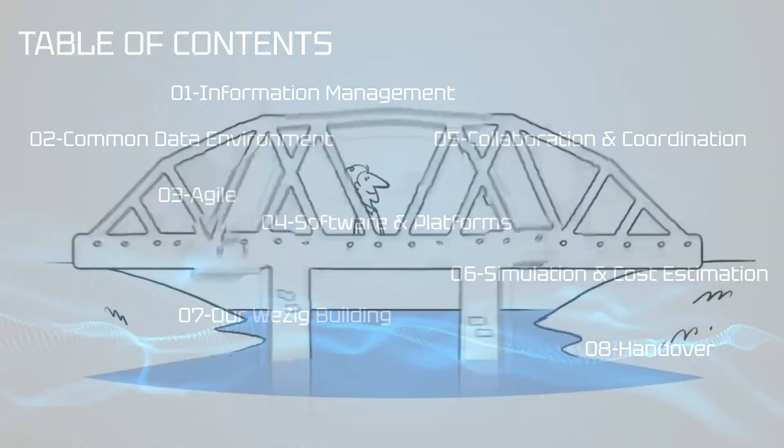In this presentation, we're going to present our master thesis defense consisting of 8 points. First point, we're going to talk about information management and its benefits for collaboration, coordination and decision-making throughout the life cycle of a construction project. Second point, common data environment, CDE, its main process and its benefits for reducing errors and improving overall project efficiency and outcomes in the construction industry.

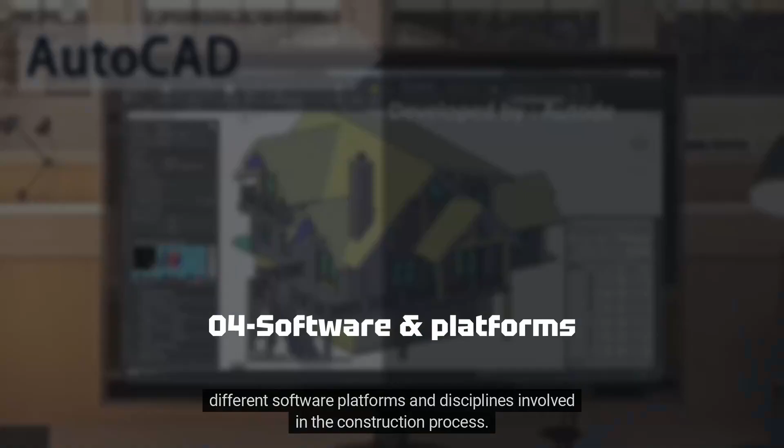Third point, we're going to talk about the Agile methodology and how we used it to manage the tasks. Point number 4, we're going to talk about the BIM software that we used during the master and how it refers to a collaborative approach in BIM that promotes interoperability, collaboration, and the exchange of information among different software platforms and disciplines involved in the construction process. Point number 5, we're going to talk about the collaboration and coordination phase.

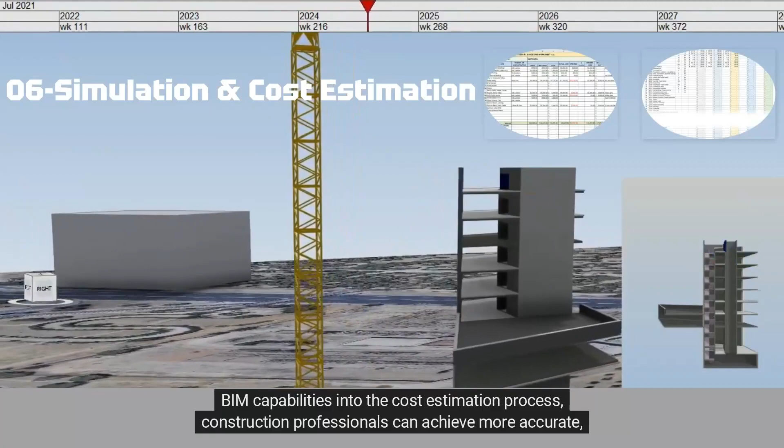Point number 6, how did we simulate the construction process and estimate the cost of the project? By integrating BIM capabilities into the cost estimation process, construction professionals can achieve more accurate, data-driven and efficient estimations, leading to better informed decision-making and improved project outcomes. Point number 7, WeZig Building walkthrough, showing our final information model and 3D graphical model.

And finally, point number 8, the handover and closeout documents phase. The main objective is to make sure that the building owner or facility managers have all the necessary information and tools to effectively manage and maintain the building throughout its life cycle.

We are talking about information management, which is very important for making a project successful. We will focus on the early part of the project when the client decides what information they need using Plannerly. They make an exchange information requirement, EIR. This helps create a good BIM execution plan by the consultant.

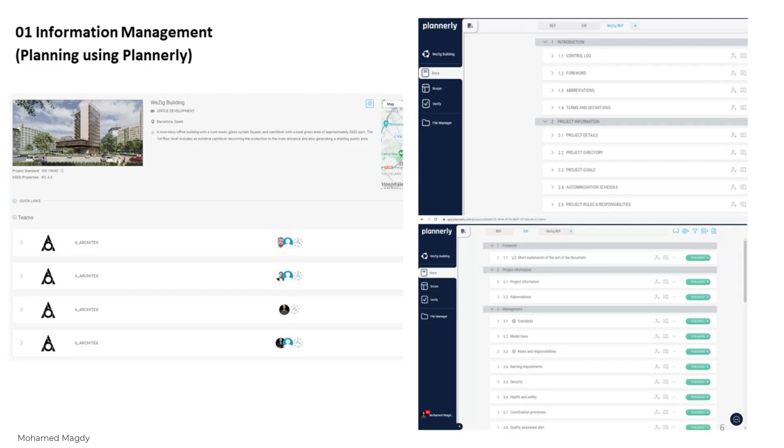At the beginning of the project, the client makes the EIR to manage all the important project requirements. This includes project rules, standards, and goals. Then, the consultant makes the BEP based on the EIR. It's an official document that holds all the project details. Our BEP is split into sections, each talking about different parts of the project.

Number 1. Project overview and information. It's a comprehensive overview of project scope, objectives, and key stakeholders. 2. Standards and naming conventions. Defining standards and conventions for consistent data handling across all project phases. 3. BIM uses and goals. Outlining specific BIM objectives for the project outcomes.

4. BIM process map. Illustrating the workflow and the methodology for the BIM implementation. 5. Technology, infrastructure, and resources. Identifying necessary tools, infrastructure, and resources required for the project. 6. Project deliverables. Listing the expected outputs and milestones throughout the project life cycle. 7. Model structure. Defining the structure and hierarchy of project models for effective collaboration.

8. Collaboration and coordination process. Outlining strategies and protocols for seamless collaboration among stakeholders. 9. Compliance plan and quality management. Detailing the plan for compliance, quality, and management protocols.

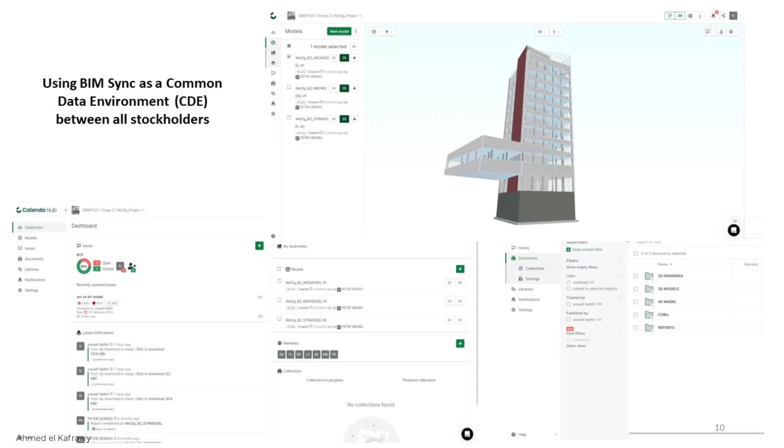A crucial aspect of our project involved communication, for which we utilized Slack. This tool helped us in file sharing and scheduling meetings to discuss important project milestones with the entire team. This efficient tool was seamlessly integrated with Google Calendar, Poly, Trello, and Zoom, ensuring that any changes were promptly communicated to all the team members.

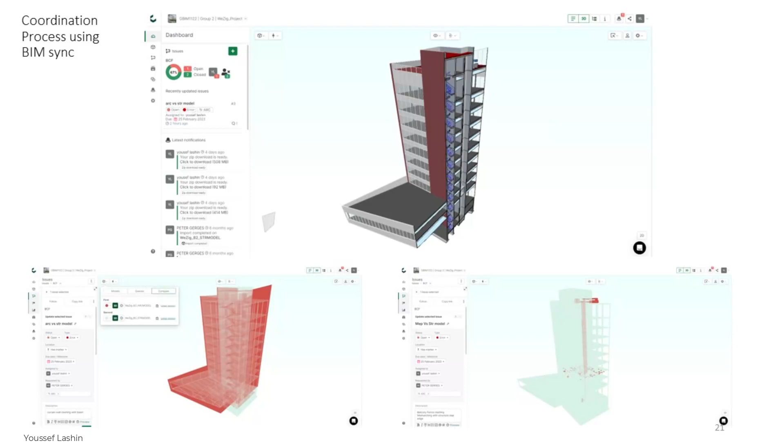Recognizing the significance of coordination, we have used BIM Sync, BIM Collab, Solibri to address and resolve coordination issues. This involved providing detailed screenshots and assigning specific team members to each identified issue. By implementing these tools and methodologies, we aim to streamline our project workflow, enhance communication, and foster effective collaboration among team members, ultimately contributing to the overall success of the project.

One of the objectives of Global BIM Master is the open standards. Open BIM promotes the use of open standards like Industry Foundation Classes, which is IFC, and the Construction Operations Building Information Exchange, which is COBie. These standards ensure that the BIM data can be exchanged, shared, and accessed across different software platforms without losing the information. Several BIM software solutions support Open BIM principles by adopting open standards and enabling interoperability.

Some software platforms that align with Open BIM that we used during our master are Revit, ArchiCAD, Tekla, Synchro, and Navisworks. These are the software that we used during the master and even during the project in all phases. It starts from design, construction, and handover phase.

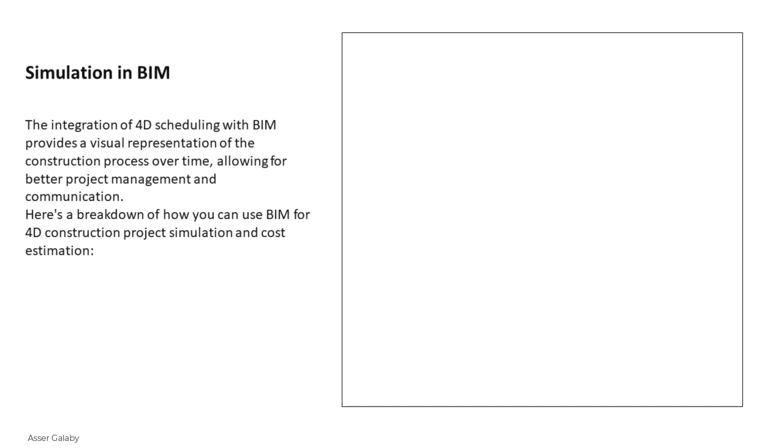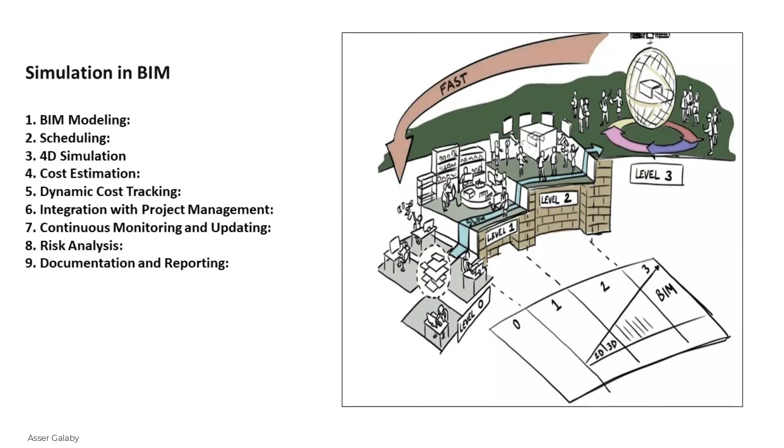BIM is a powerful tool that can be used for 4D construction project simulation and cost estimation. The integration of 4D scheduling with BIM provides a visual representation of the construction process over time, allowing for better project management and communication. Here's a breakdown of how we can use BIM for 4D construction project simulation and cost estimation. Develop a detailed 3D BIM model of the project, including all relevant components and details. Ensure that the BIM model includes all accurate information about quantities, materials, and specifications.

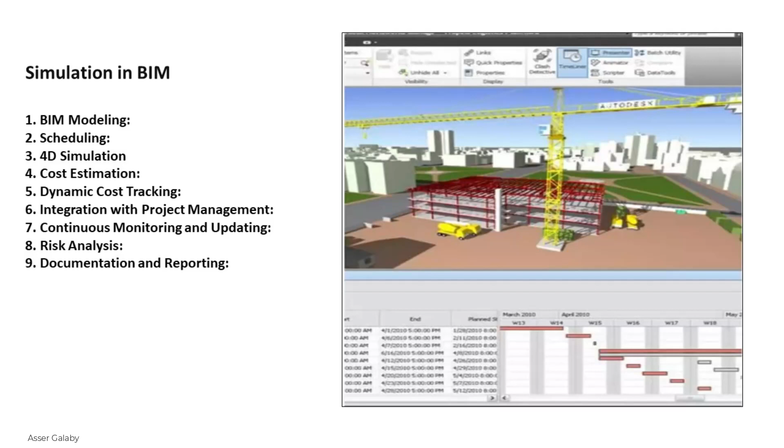Integrate the BIM model with the project scheduling software to create a 4D simulation. Assign time-based information to elements in the BIM model to represent the construction sequence accurately. We use Synchro Pro for our 4D BIM planning study. Provide a visual representation of the construction process over time, helping all stakeholders better understand the project progression. Identifying and resolving clashes or conflicts in the construction sequence before they occur, reducing rework and delays, enhancing communication among project stakeholders including owners, architects, engineers, and contractors.

Use the BIM model to extract accurate quantities of materials and components. Link the quantities to a cost database to estimate the project costs based on the current market rates. Consider factors such as labor, equipment, and overhead costs in your estimations. As the 4D simulation progresses, update the cost estimation based on the current status of the project, monitoring changes in the project scope and adjust the cost estimates accordingly.

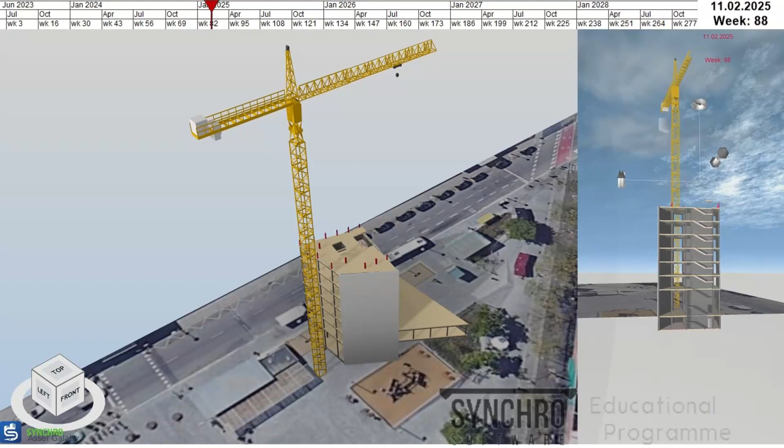Integrate BIM with the project management tools to ensure seamless collaboration and information exchange. Connect the 4D simulation and the cost estimation data with the project timelines, milestones, and budget tracking. Regularly update the 4D simulation and cost estimates as the project progresses. Use real-time data to make informed decisions, identify potential issues, and optimize construction processes. Utilize 4D simulation to assess and mitigate potential risks by visualizing their impact on the construction schedule and budget.

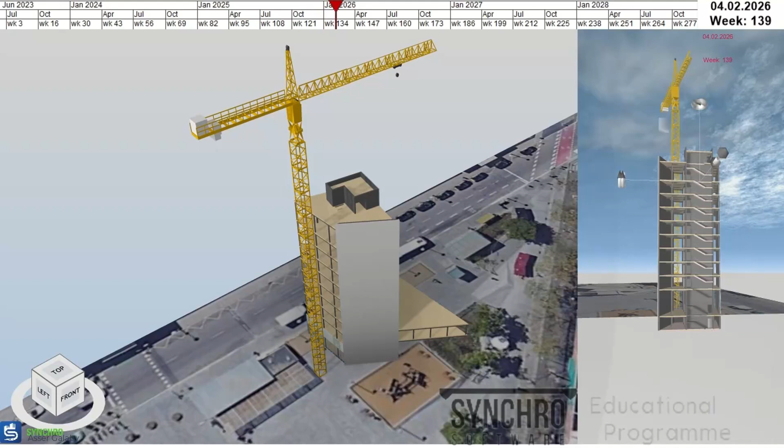Generate reports and documentation based on the 4D simulation and cost estimation data. Communicate progress and financial status to stakeholders through visual reports and presentations. By integrating 4D construction project simulation and cost estimation through BIM, you can enhance the overall project management processes, improve decision-making, and ultimately deliver projects more efficiently and cost-effectively.

Handover. After a long journey to complete the project and ensure its quality, the team had to ensure that the success would continue after handing over the project by preparing the Asset Information Model, AIM. This critical process involves not only protecting physical assets, but also ensuring the seamless transfer of information to empower those responsible for the ongoing project lifecycle. This is important to maintain the client happiness and satisfaction.

Project handover involves the transfer of comprehensive data related to an asset at the conclusion of a project, encompassing both graphical and non-graphical information within the context of Building Information Modeling, BIM. Graphical data includes the geometrical representation of the asset, comprising 3D models, plans, and visual documentation. Non-graphical data, on the other hand, incorporates a wealth of information such as material specification and any other relevant documentation crucial for the asset's ongoing management and maintenance.

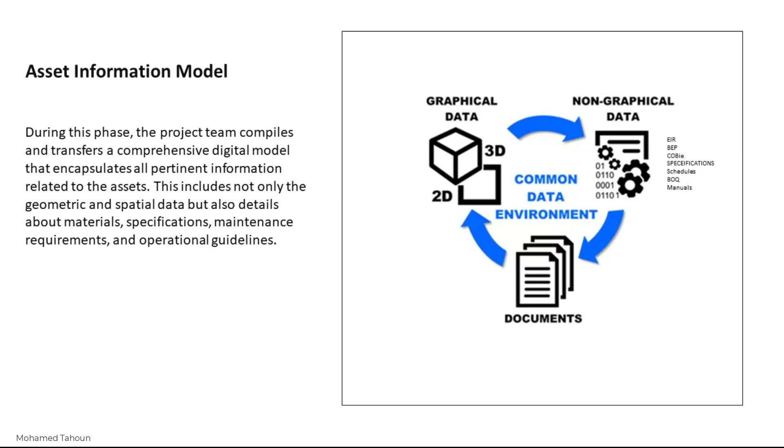The team objective of this process is to empower the appointing party with the tools and information necessary for effective asset management throughout its life cycle. The team in this process was focused on delivering a complete and organized package that enhances the appointing party's ability to maximize the asset performance.

Alongside the submitted AIM to the appointing party, the team has also submitted a COBie spreadsheet that client facility management would need, which includes all the contacts and stakeholders who worked on the project, in addition to the project information, spaces, zones, different systems, levels, floors, and other necessary information.